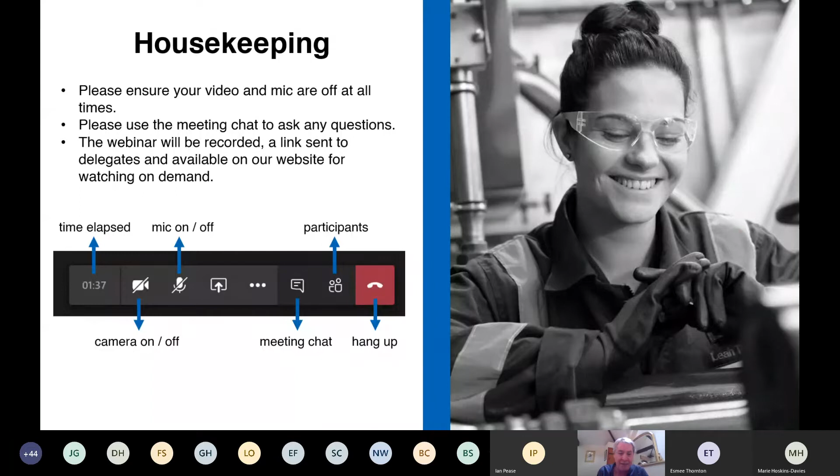First, I'm going to have a quick look at how traditional generation fits within the future energy need as we talk about energy transition, including how we're moving to net zero carbon generation by 2050 and how we'll achieve that.

We'll then look at the nuclear industry, with our colleague Doug Harrison from the National Skills Academy for Nuclear looking at what's happening in the nuclear sector in the UK. Then Jill Glennie from Petrofac will look at the future of oil and gas, a major transition as we see decarbonisation taking place.

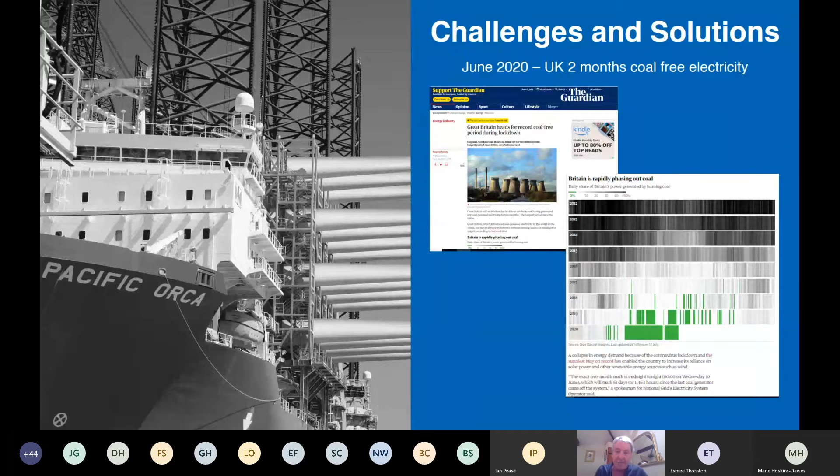If we move to the next slide, we'll see what is generating our electricity. In my youth, coal was the major generation method, and we've all seen cleaner skies and air quality during lockdown. This gives an idea of where our energy is currently coming from, a screenshot I took from an app yesterday, showing no coal was burnt whatsoever.

45% of our electricity yesterday came from burning gas. Nuclear and wind both came in at about 18%, and solar came in at about 3.5%. That gives an idea of the transition happening. Burning gas is a far cleaner method of generation than burning coal, so it's great to see how we're gradually transitioning.

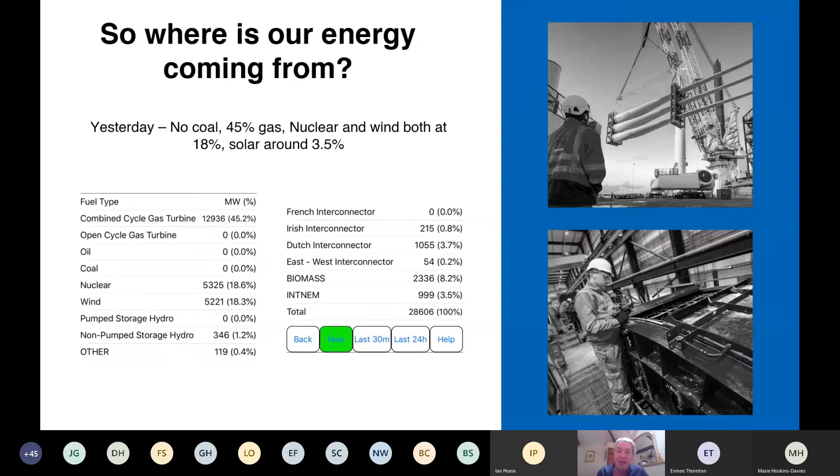But we now need to work out what to do, whether we stop burning gas or continue, and if we continue, how can we do that more cleanly. We'll hear more later from our speaker from the Oil and Gas Technology Centre, Neil Wilkinson, who will talk about carbon capture and storage, a key element if we want to continue burning hydrocarbons. If I could have the next slide, please.

So as I said, we're gradually getting rid of coal as a method of generation, but what will replace it? Gas has been a major transition for us.

We have two major terminals, one in Scotland and one in England, which also means we have interconnectors to mainland Europe. Gas is still plentiful, both indigenous within the UK continental shelf, but also via interconnectors from the Netherlands and from our colleagues in Norway. We also have massive opportunities in nuclear.

We have nuclear new build capacity in my region, both at Sizewell and Bradwell, where we're looking at a large potential for new build nuclear generation.

Renewables are gradually bringing in more and more in terms of our supply. We're looking at both onshore and offshore wind, also other areas such as biomass, and solar. We won't talk much about hydro, because we don't have many hills or mountains in the east of England, but that's another area of major generation for the future.

Something else being considered now is the generation of hydrogen. Hydrogen can be a very clean fuel - it can be burnt, and the only thing it generates is water. So that's the lovely thing about it, a very clean method of generation. However, currently it's quite expensive to generate hydrogen, but there are different ways being looked at now to generate it much more cheaply.

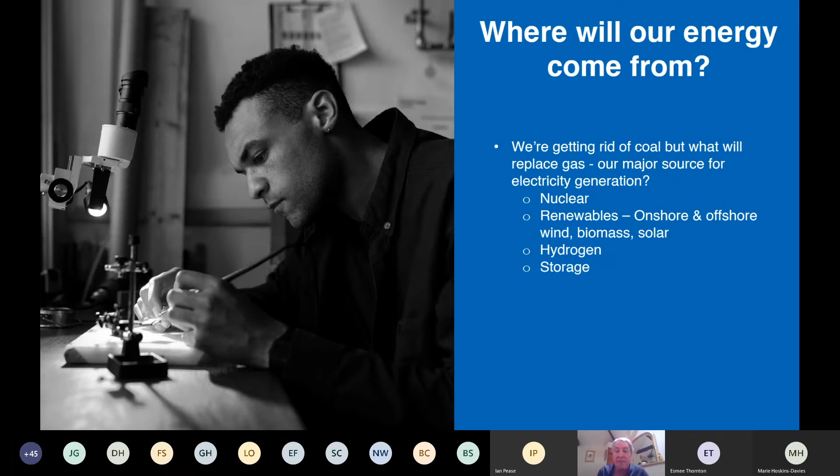I think that's the end of my presentation, if I remember correctly. So I'm now going to hand over to some of the opportunities that this will also create.

I think one of the key points here is that the UK is at the very forefront of carbon reduction. We're leading the world on this, and that means with world-class companies in the UK, it gives us opportunities for export. I think you'll find other nations beginning to emulate and develop what we're doing here, offering opportunities globally for future careers as well.

And hopefully people will go away to other countries and then come back to the UK where we can benefit from their skills.

So we'll be looking at things like carbon capture and storage, onshore and offshore wind, hydrogen, and today we'll be considering some of those alternatives and reflecting upon the possibilities for development, job creation and employment. And at the end, we'll have our panel of expert speakers who will be able to assist you in that. I think I'm now handing over to Doug Harrison from National Skills Academy Nuclear.

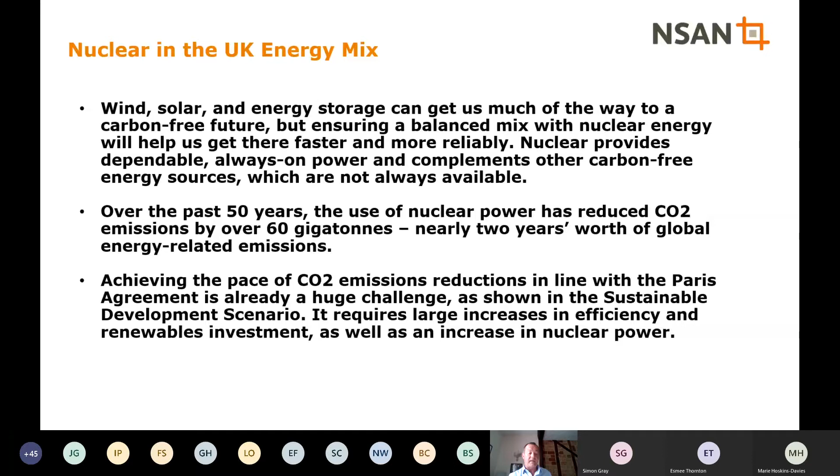We need a stable energy supply, and nuclear will allow us to achieve this alongside other forms of electricity production. However, the biggest barrier to new nuclear at the moment is mobilising that investment. One of the ways we're looking at that is we're waiting for the energy white paper to be published. But obviously, over the last year or so, there have been delays due to Brexit and COVID-19.

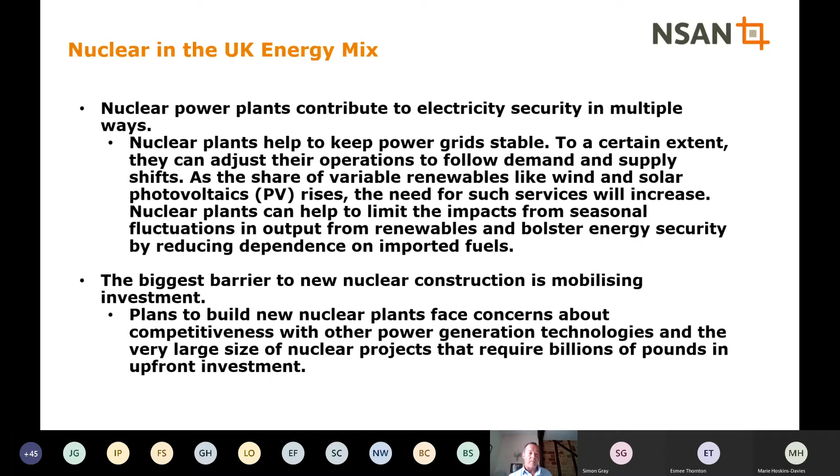So even though we have virtually stopped, as Simon said earlier, burning coal to produce electricity, which is a good thing, we still rely on burning gas to produce over 50% of our electricity. Current and future low carbon forms of production are necessary to bring this figure down further.

The link here will give you a live idea of what is being used at the moment. And on a cloudy, calm day in Norfolk, the link shows a live picture of the UK electricity generation, and I have that up as of 10 o'clock this morning. Gas, 52%, as Simon said. Nuclear, 16.7%. Wind is 10%, and solar is 8.6%. And obviously that would change as the weather patterns change.

So now turn our attention to current and future projects within the nuclear sector. As I say, 8 minutes is not a lot of time, but I have shown links to each of the projects that I'll cover in the next slides, where you can find out a lot more information.

Starting off with the nuclear sector deal, it's now 2 years old, so we have a way to go to achieve the targets stated there. And as I said previously, Brexit and COVID-19 have not helped.

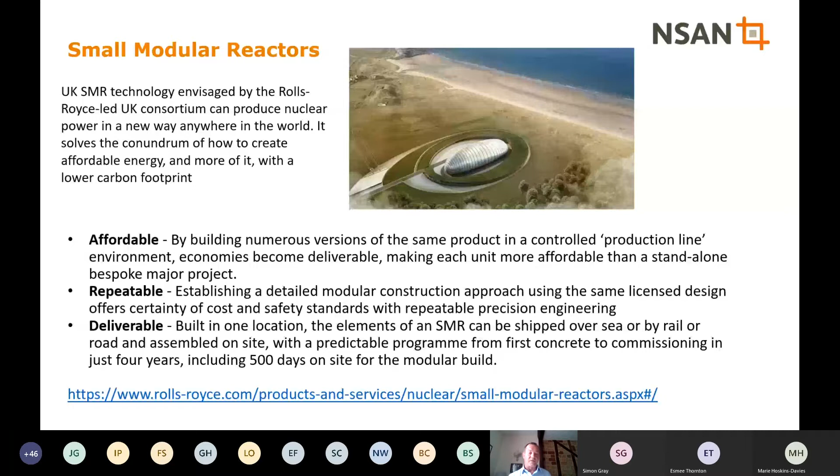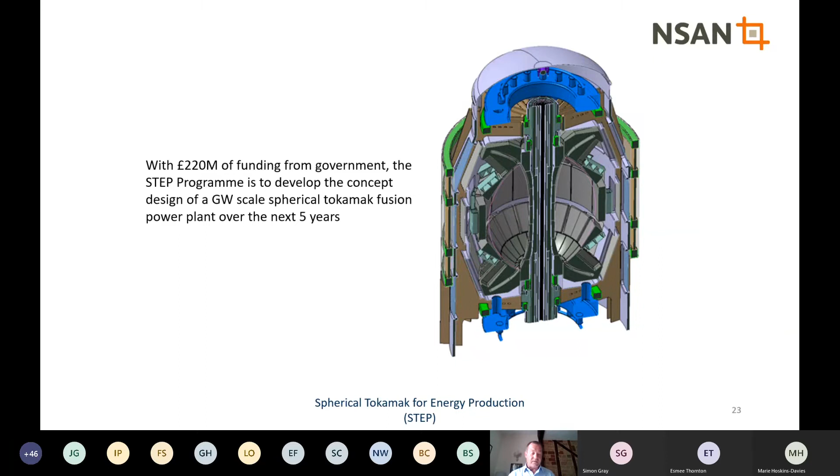And the next slide just shows a typical fusion power station, how it could look like, and what it's got there is three of the STEP.

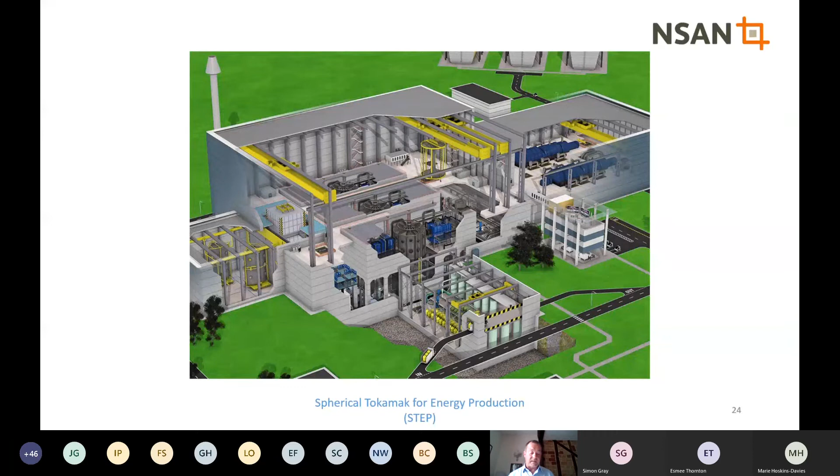Then the next slide is the largest, the International Thermonuclear Experimental Reactor, in Cadarache in southeast France. 35 nations are involved in the build and operation of this, and the experiments taking place at JET are feeding into the development of that.

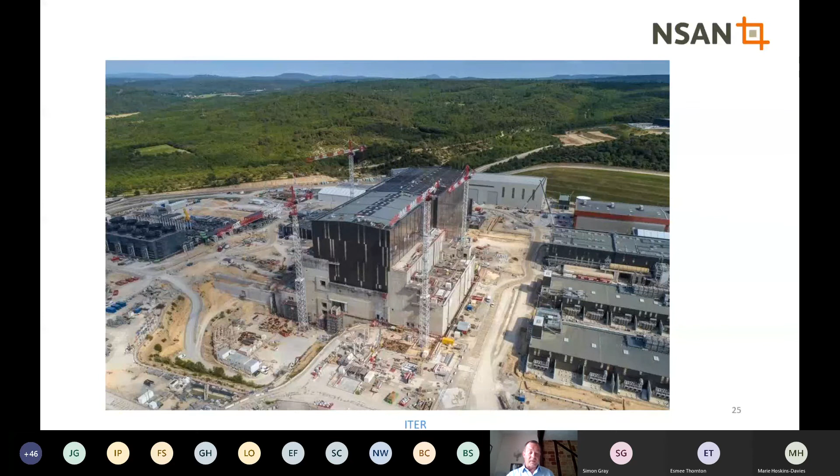Moving on to my last item, which is the Geological Disposal Facility. A permanent solution is needed for the storage of UK nuclear waste, and I was on a webinar last week - interesting to see that a lot of coastal communities have shown interest in siting one of these, the GDF, as they see that it can be built underneath the sea.

And then lastly, just talking about net zero - Simon did touch on it, but really net zero needs nuclear. I'd like to finish on one quote from someone high up in the industry who has the ear of government: the UK needs to double the current nuclear new build to reach its target of net zero by 2050. So finally, on the last slide, I'd like to thank you for listening.

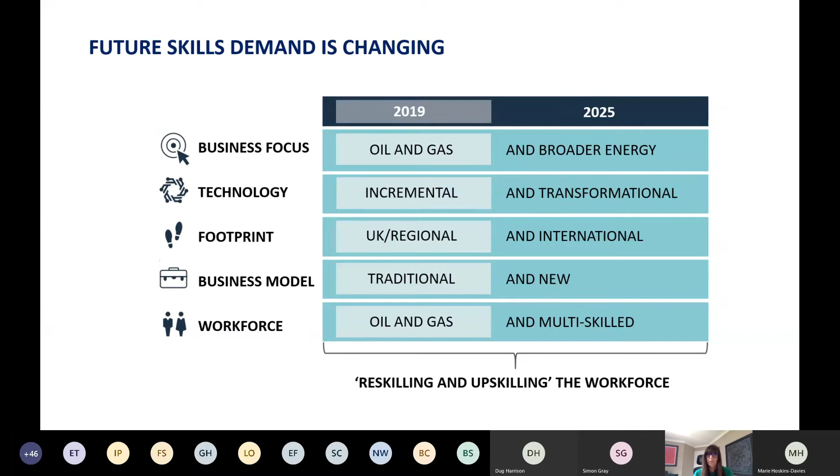So that's very much talking about an energy workforce, and all of this creates an urgent need to reskill and upskill the workforce. If we go on to the next slide, please.

The application of new technology will enable far more adaptable and agile work environments, in contrast to the more traditional matrix type organisations. Just a sample of the array of roles that are great for inspiring the next generation: we've got 3D material scientists, work gamifiers, even avatar relationship managers.

There's a combination of real-time data analytics and artificial intelligence that will need more insight and decision-making deeper into organisations. But there's still a significant need for traditional skills in terms of mechanical engineering. So it's not just that, it's communications, engaging with people, safety, coaching, planning—skills that I know you'll all have in abundance.

Just from my background, I joined OPITO a year ago, and over the past 12 years I've worked with four oil and gas operators, with colleagues who have left careers in the military and joined those organisations, working both on and offshore. I've worked with submariners who've become OIMs and ops managers, planners and security advisors who've become directors and VPs of HSE, medics and mechanics who have left the Navy and have been in their absolute element working on the FPSOs, which are the floating production, storage and offloading vessels that work basically the same way platforms do.

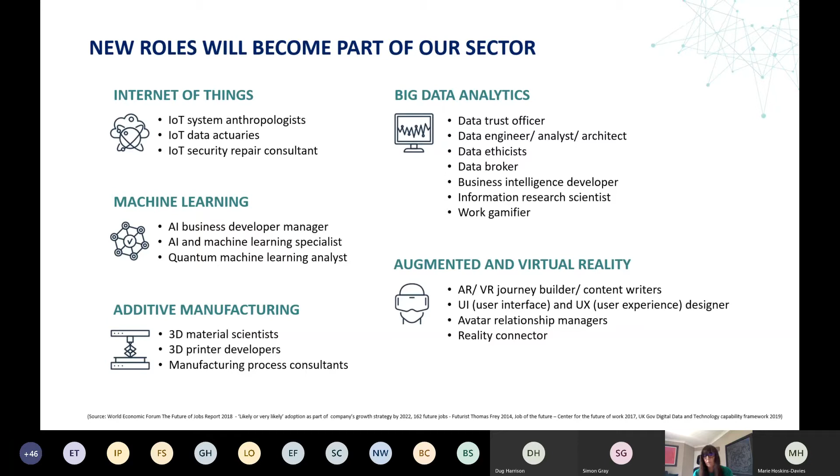And what's evident is that teams will need to be more flexible and nimble compared to what we've seen in the past. If we can move on to the next slide, please.

When we published our report last May, we highlighted that new and innovative ways of learning and development will emerge, and over the last few months the need for that has progressed at speed. OPITO is collaborating with industry and our training providers to ensure the industry has access to the right skills. Improved collaboration will help the curriculum and training methods adapt more quickly to the changing demands of the energy transition and enable a real focus on lifelong learning, so learning for all ages.

The combination of new technology, machine learning, AI and expert systems, alongside new training methods such as computer-based training, virtual or augmented reality and simulation, is really transforming how people are learning and gaining new skills. It also means people can acquire new skills and competencies and transition into other sectors in a shorter time. During the lockdown, we've seen substantial change to existing training provisions, even across our approved training centres, and we've worked closely with them to enable them to deliver training digitally, and this will continue.

Final slide, please. So I've mentioned the reports that we've done, and the next stage for us is using those two research reports to bring the broader energy industry together.

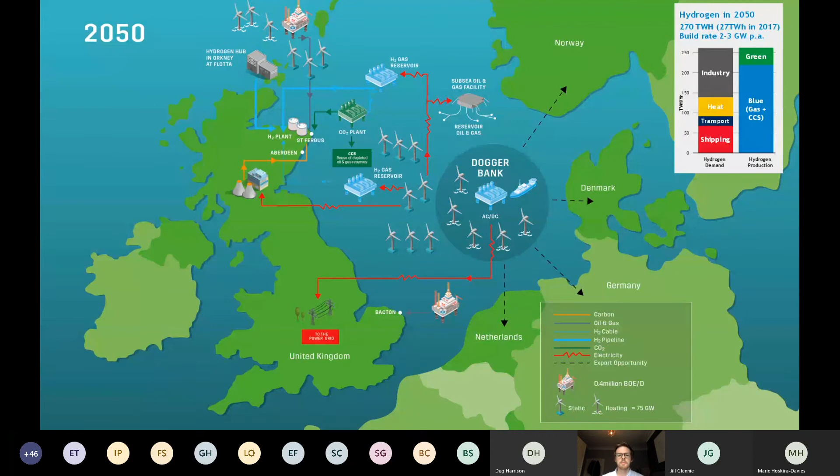So this more or less summarises that previous slide. Currently, right now in the UK, we require 300 terawatt hours of electricity. By 2050, due to large-scale electrification, moving to electric cars, we're going to see well over double that - 645 terawatt hours of electricity. For that we need technology, policy, legislation and strategy. But importantly, what we need is approximately 175 million tons of CO2 storage per year, where currently we have zero.

But there are a few projects underway at the moment, and we see a massive upscale in CO2 storage as we move forward. Next slide, please.

Here in the UK, we have projects underway looking at carbon capture, utilisation and storage. The one I'm mostly involved in is the Acorn project, up here in Scotland. In addition, as you can see, currently we have no storage projects in operation, but we're trying to get to a stage where we're storing 175 million tons.

But at the same time, we have a huge capacity for CO2 storage here in the UK. That presents fantastic opportunities for the import of CO2 from other countries. I know early on Simon mentioned being able to export our expertise to other countries, but at the same time we've got an opportunity here to be a hub for the storage of CO2 for the rest of the world and Europe as well, which allows us to charge them for that, which is great for the UK economy.

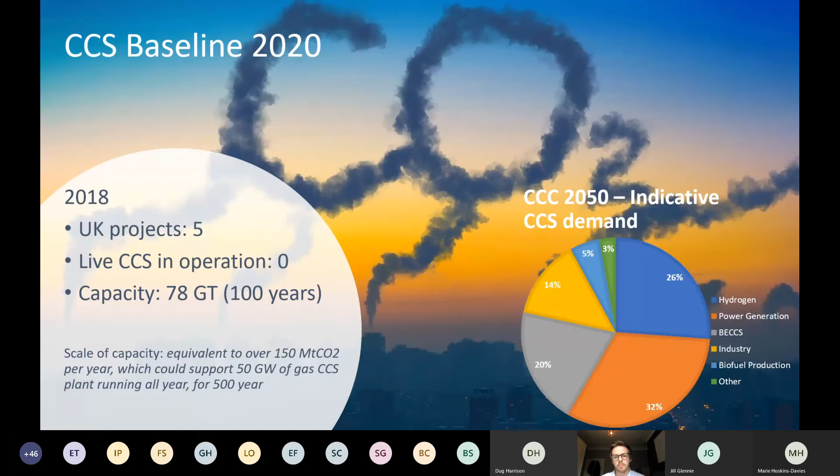So we're seeing carbon capture demand across all of these industries mentioned on the right: hydrogen, power generation, bioenergy, industry, biofuel production, and a few others as well. Next slide, please.

From a technology point of view, there are actually a number of technologies looking at carbon capture, but at the moment one in particular is leading the way - post-combustion carbon capture technology. Simon alluded earlier to around 45% of energy production coming from burning gas, so at the moment carbon capture is very much required.

And the technology I spoke about, post-combustion carbon capture, what that does is process the exhaust gases from these industries and strip the CO2 from that gas stream into another form, where it is then processed and sent away for storage.

This technology uses, in most cases, a solvent, where the exhaust gas is put into one of the funnels you can see in the top picture. As that gas rises up in the funnel, an absorbent is also flowing down the other way, and in essence, through a chemical reaction, the CO2 is captured in that sorbent, or solvent, and then that is processed and subsequently sent forward for processing and storage.

And the bottom technology is one we're seeing developing rapidly, certainly in the USA, where they've got a lot of requirement, a lot of legislation, and a lot of tax incentives for the use of carbon capture. Direct air capture is a very cool and new piece of kit entering the market, and that's sucking carbon dioxide purely from the air. It doesn't require any brownfield mods of existing infrastructure - it pulls CO2 directly from the air. Next slide, please.

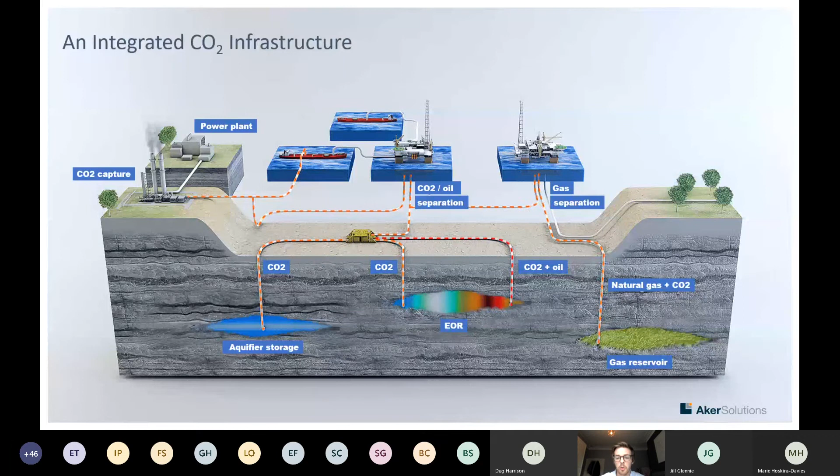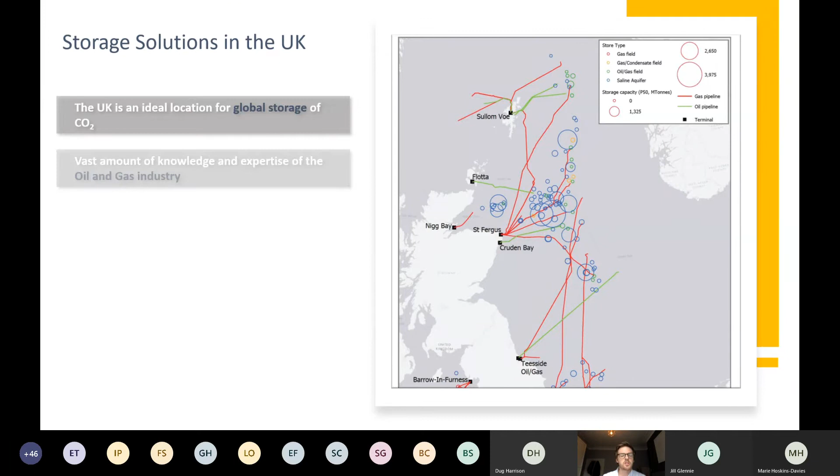A question was raised by Shane in the chat, and this slide showcases that. What we're really good at here in the UK is oil and gas, and we have existing infrastructure already in place so we can effectively store, transport and store CO2 at scale. In many of the UK clusters right now - Humberside, Teesside and Scotland - we're looking at decarbonising that industry and helping job growth and the economy. One area I'm involved in is the decarbonisation of Grangemouth and the east of Scotland using the Feeder 10 pipeline, an existing pipeline from St Fergus all the way to Grangemouth. That's an example where we can reuse existing oil and gas infrastructure to capture CO2 at Grangemouth, transport it all the way up to St Fergus for processing, and then inject it in the North Sea.

These are a number of locations in the North Sea where we can store CO2. Next slide, and a few clicks as well.

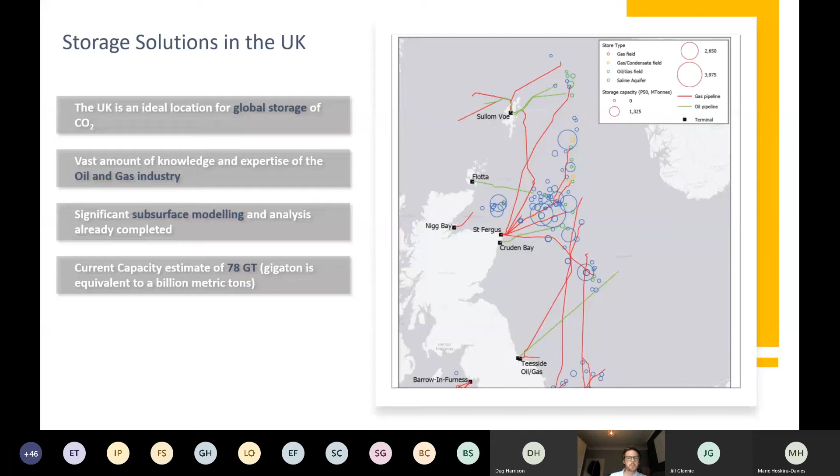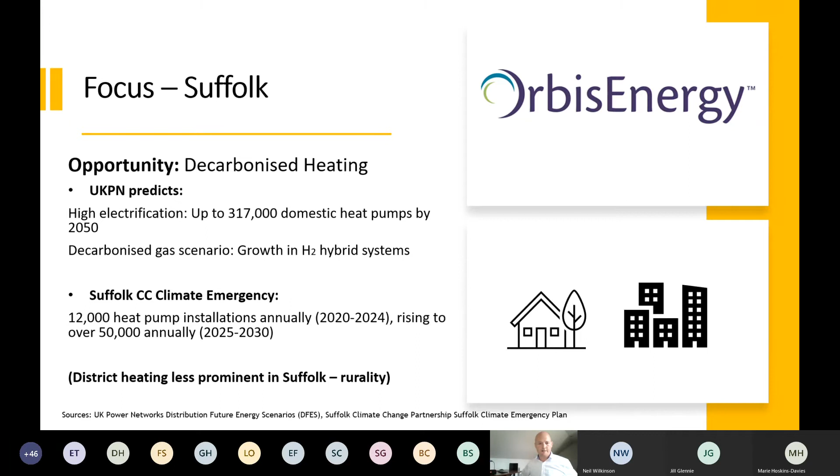From a generation perspective, UKPN expects solar PV to be the main form of distributed generation in Suffolk, both commercial and domestic, representing up to a 5 times increase in solar PV by 2050. It's also really interesting that much of Europe's PV fleet is aging, approaching 10 years old - by 2025, I think 100 gigawatts of power will be over 10 years old. There's an opportunity here around inverter repowering. Anecdotally, I bumped into a neighbour the other day who told me that after 9 years, his inverter for his PV system had just failed and he's had to have a new one put in. So opportunities there in electrical engineering.

Okay, next slide, please.

Energy efficiency is probably the most overlooked factor on our journey to net zero, yet these measures are probably the most effective and easy to implement. We'll see new incentives, increased awareness campaigns, and significant growth in uptake of energy efficiency measures, including loft insulation - yes, people's lofts still aren't deep enough, mine included - cavity and solid wall insulation, heat controls and draught-proofing improvements, and the prevalence of triple glazing windows. These figures come with a health warning, as they're based on a high case scenario for this county, required to meet 2030 net zero targets, which are 20 years earlier than the government's 2050 targets.

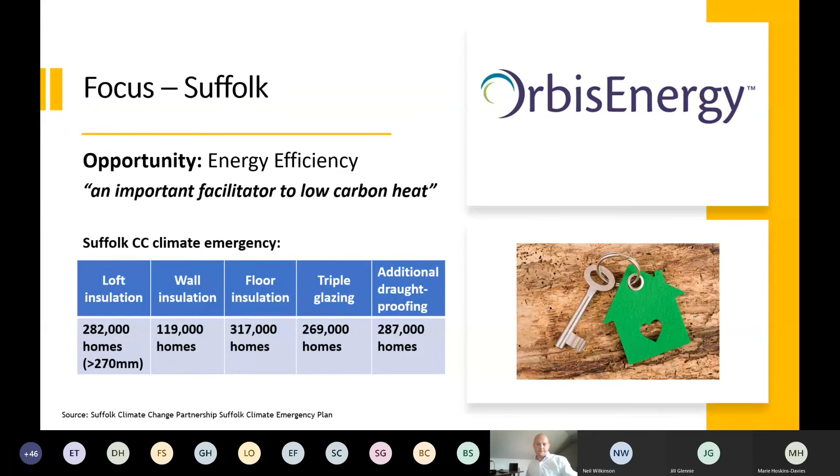Next and final slide, please. To conclude, the clean energy revolution is happening in East Anglia - we are the all energy region, and we're leading the transition to clean energy. It's really important for you to consider carefully the underpinning skills and competencies which will support a range of energy technologies. Some will come to fruition and some may take a little longer, but those skills in electrical, mechanical, process, health and safety...

Hello, my screen's just frozen.

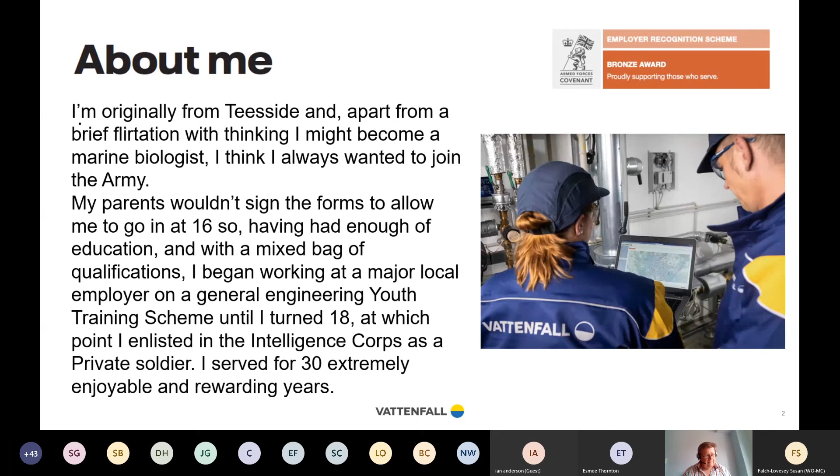It's broader than that - it's not just the physical security aspects, there's a whole element of personnel security as well. As you can imagine, if we're proposing to build a huge wind farm, especially onshore, or a massive substation which is going to sit onshore, not everybody leaps with joy. Some people can get fairly agitated about that, and some of that opposition and agitation can spill over into quite vociferous protest.

So there's often liaison with police forces in the various regions just to make sure that anyone who really does want to take umbrage doesn't pose a risk to our people or to the public, or indeed to the project. I do travel security as well, because our people travel a lot, or they did before COVID, and event security, because we like to crow about it when we open up a huge wind farm, get a dignitary in, and clearly we need a security plan to keep them protected.

In terms of what advice I can give you, I'm not sure how well placed I am to tell you all about it. I put down the first thing was networking, although acknowledging that I kind of stumbled across my job, but talking to as many people as possible in the industry to get an understanding of the breadth of roles that are out there is not a bad start point. I mentioned research as well - trying to make sure that my CV was applicable to the industry was a bit tricky.